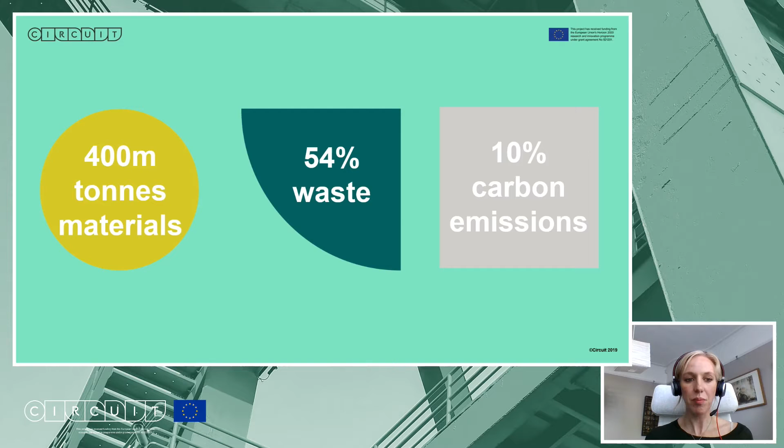And it has been impossible to ignore over the past few years the growing interest and focus on the climate emergency, on climate change. This has been as apparent in London as it has been across the globe. We will probably all remember the protests that have happened, and following this, during 2019, 26 boroughs and the Mayor of London all passed climate emergency declarations and have been working out the strategies to deliver those since.

And now, even more on topic, there are calls from a wide variety of sectors for a green recovery post-COVID, and with the aspiration and call from many areas to build back better. So we need to find solutions that allow cities like London to accommodate growth whilst also tackling the climate emergency. And circular construction is one of these solutions. It's not going to solve the picture by itself, but it's going to help.

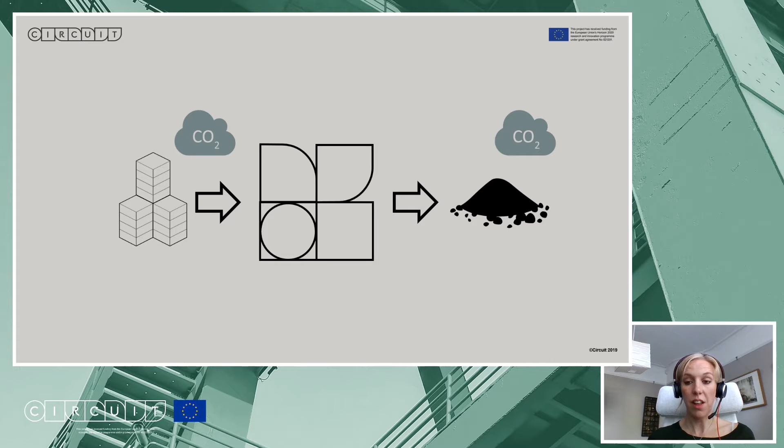And so the basic premise of circular construction is that instead of starting from scratch every time a new development need is identified, using virgin materials and discarding anything that was previously in that location, we aim to close materials loops. We can do this in a variety of ways by reusing materials, sharing either the assets themselves or materials and components within those assets, leasing, repairing, refurbishing, upcycling, and as we often say when we're talking about circular economy principles, finally recycling. Recycling is our last resort in a circular economy world, whereas currently it's often seen as the best outcome that we're aspiring to.

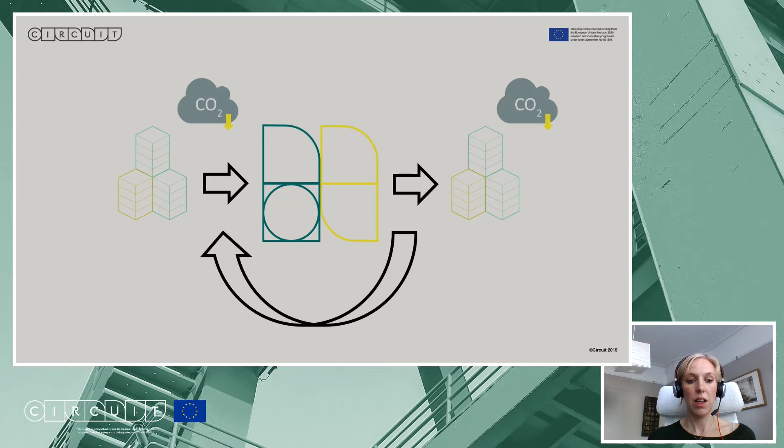And we believe if we start each new development as an opportunity to really embrace circular construction techniques, we could dramatically reduce the carbon emissions associated with the growth of our city. Now, these are not new ideas. It's not brand new thinking. This has been going on for a number of years. I was researching these ideas when I was in university. And so there's been pockets of good practice and great exemplars both across London and across the globe.

But the reality is that these are still the exception. They are not the norm. And if we really want to deliver that growth whilst minimising carbon emissions, like I was suggesting, we need to dramatically scale up the adoption of circular construction techniques. And it needs to become the new norm. It needs to be embedded in city policy, and potentially national policy and global plans as well. And that is where the Circuit project comes in.

So I'm now just going to give a little bit of an overview of the Circuit project. It is a 4-year Horizon 2020 funded project. And at the heart of it, the intention is to increase the uptake of circular construction and enable cities to initiate a circular transition. It's a collaborative project. It started around a year ago in mid-2019 with around 30 partners from across 4 cities in Europe. We have partners here in London, in Copenhagen, Hamburg, and the Helsinki region. And within those partners, we've got all different parts of the built environment value chain represented.

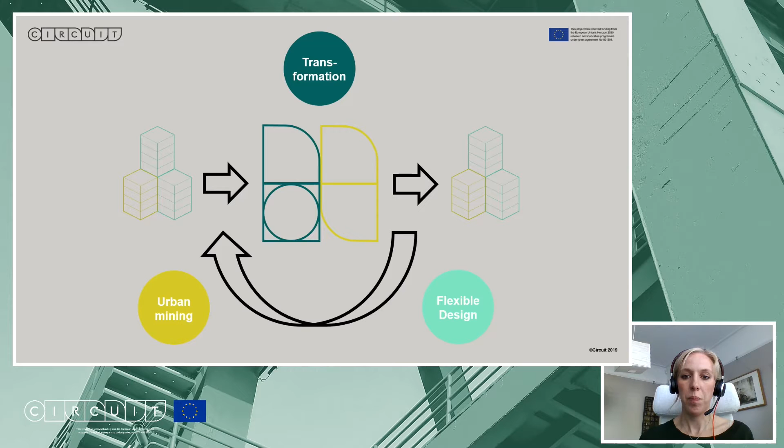So what we're doing in those focus areas is across the 4 cities, we are going to be looking to address some of the barriers and develop solutions in each of those focus areas. We're going to be doing 3 demonstrations for each topic in each city. So that's 36 in total. And this is all going to be supported by a stream of work looking at data. That stream of work is being led here in London by the BRE. So that's looking at both available data, what data we should be collecting, and also how to use that data better. And then this activity in the 3 focus areas is going to develop the insights and materials that we need to explore citywide systems, whether that's governance and planning systems, training and knowledge sharing, or data platforms.

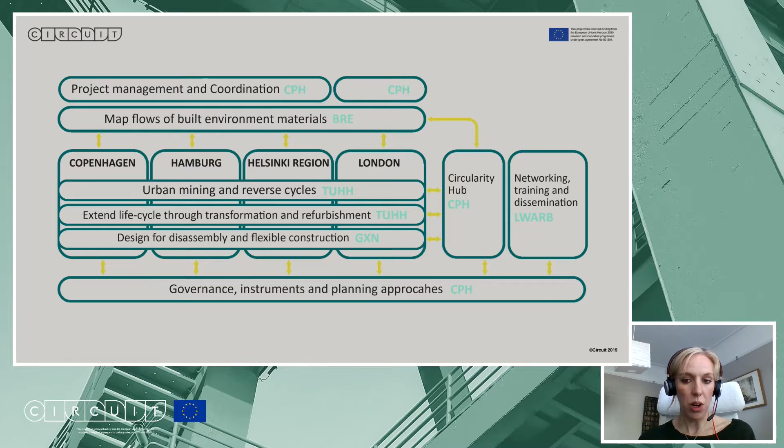Just a little bit more detail on what I mean by those three things. So the examples of the governance and planning activities that we're going to be looking at are developing criteria for public procurement of circular construction, recommendations for urban planning policy, tools to collaborate with developers on implementing circular construction techniques, and roadmaps for each city.

The training and knowledge sharing activities are going to be really wide and varied. This event today is part of that, so there will be further events and other hackathons throughout the rest of the project. We will be setting up a variety of networks. So some of these are going to be industry networks, and we'll also be having networks focused on policymakers within the 4 cities to share best practice. And also we're going to develop a network of city authorities outside of our 4 partner cities to help disseminate the findings further, and also to learn from other cities outside of our partners.

There's a range of training activities going to be conducted. These will be towards the latter part of the programme, but we will have some e-learning modules created. There will be summer schools hosted at our 2 partner universities, one of those being Imperial College, and there'll also be some in-person training sessions.

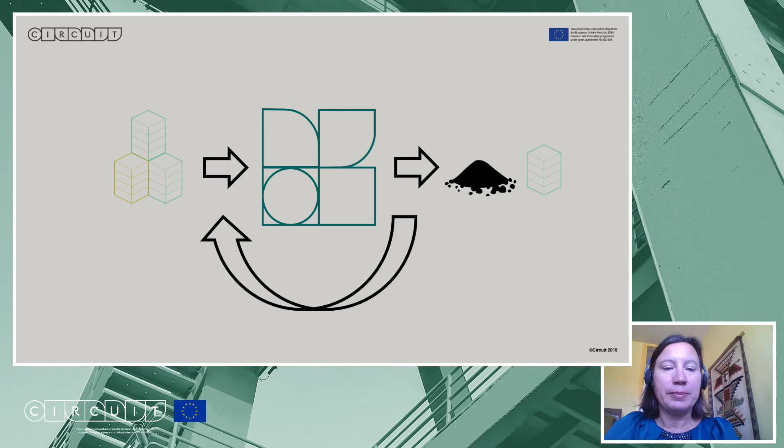So it's one of 3 areas that are really trying to do a practical transformation in terms of these 3 aspects of circular economy. And within each of the cities, there are these 3 demonstration projects within each of the 3 areas that we're going to talk about just now. So in terms of the urban mining, as I said, the focus is really on demolition. And one of the key aspects of, I don't know if we can go to the next slide.

So the next slide gives a bit more detail about what sort of sits underneath that particular work package or aspect of work. So a really key aspect is pre-demolition audits. So we already do these pre-demolition audits across Europe. There's a mixture of voluntary and mandatory systems that are in place. In the UK, it's very much a voluntary process.

But I think it's fair to say that everybody's doing it slightly differently, and also the actual process of doing the pre-demolition audit can be quite time-consuming, and there isn't necessarily any follow-up in terms of what actually happens post-demolition.

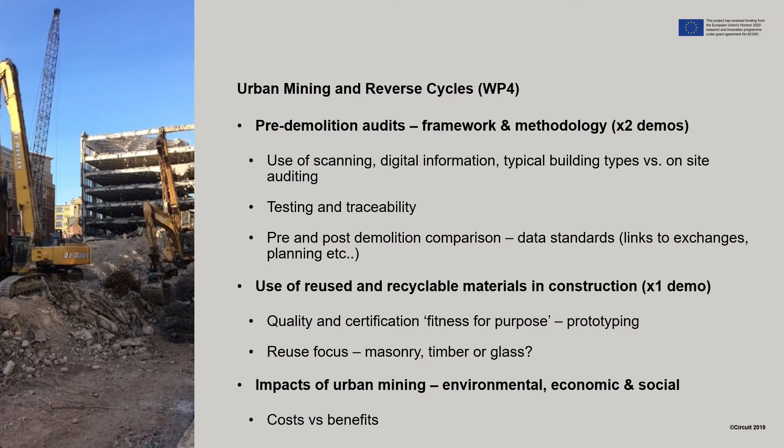So a key aspect is to sort of standardise that process. There is an EU protocol on pre-demolition audits. So linking into that, what is our framework that we can harmonise, and the methodology that we can test out to actually make pre-demolition audits a much more valuable tool in the process of circular economy.

So within London, as with each of the cities, there are 2 demonstration projects. So anybody that's keen to volunteer projects, it'd be really, really good to hear from you.

And we're trying out a combination of approaches, because the other thing that we're very keen to do, particularly in London, is to use technology to make these audits not only quicker and easier to do, but then also the ability to transfer that information to make the calculations, for example, on environmental and economic cost-benefit analysis, to make that much easier.

So if we have this database of existing information that we can import, then we could potentially speed up and make better decisions in terms of the ability, for example, to reverse some of the elements within the built environment, reuse, ideally. And with that also comes the idea of greater or more robust testing and traceability. So from the pre-demolition, all the way through to where the products and materials may go back into the built environment.

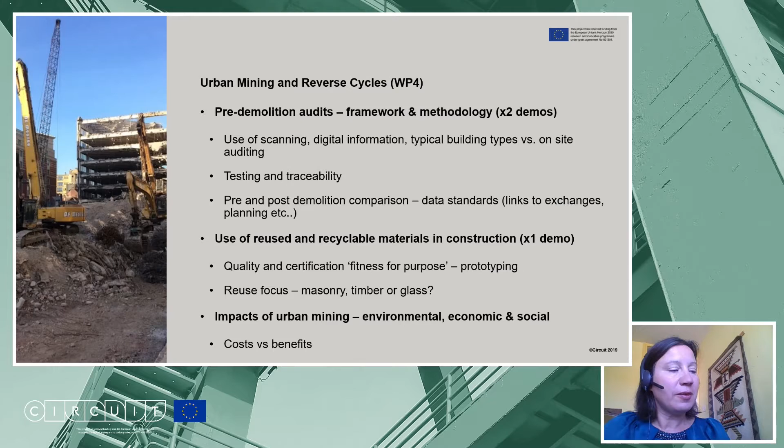So I think that's enough from me. I don't know if there are any questions. If you've got a difficult question for me, I'm hopefully ready to receive it. Thank you very much. Hi, Jay. Thank you very much. I'm just going to move us on, I think, for time, but no doubt some of our attendees will have difficult questions for you.

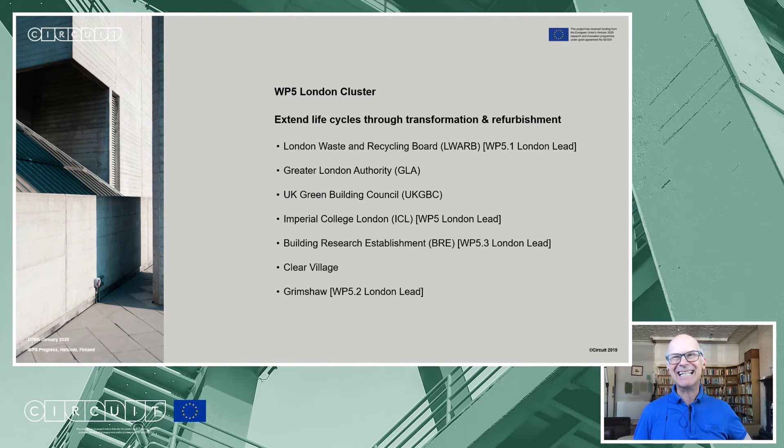So in this work package, this presentation just shows some of the partners involved, and we've had some of them described earlier. We're really looking at extending the life of our buildings through transformation and refurbishment. And we've split up our work into a series of work packages, and we'll just go through each of these. So my next slide, please. And one of them is to identify target buildings and neighbourhoods for transformation.

Can we pick upon neighbourhoods? Earlier on, Andrea showed some of the developments in London, looking at maybe homes or buildings for 500,000 people that could experience transformation. But how can we appropriately identify those neighbourhoods and do it in a way that is sympathetic to the existing residents and ensuring a solution that is going to last? It's so easy to talk about sustainability, but not deliver a sustainable solution that will last generations. So this is one of the areas we're looking at.

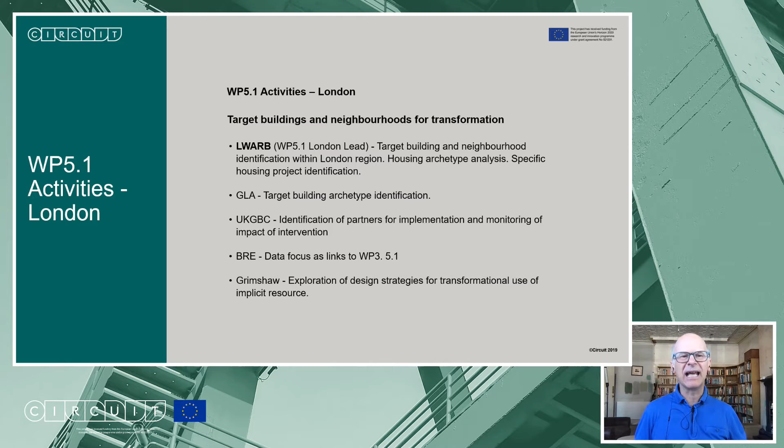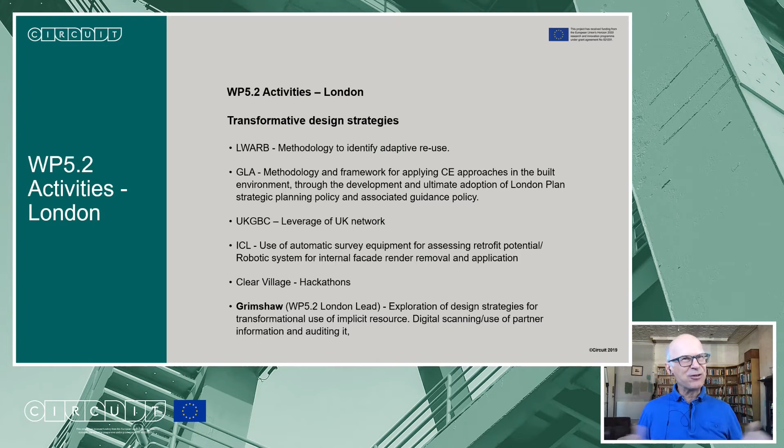Our next slide shows an input principally led by the architects within our team, looking at transformative design strategies. I am a professor, and of course I love definitions. For me, design is the transformation of an existing state into a preferred state. Now that's a very academic or generic definition, but design for me is about transformation. What is it now? And what could it be that we actually want? And that transformation is absolutely key in our thinking.

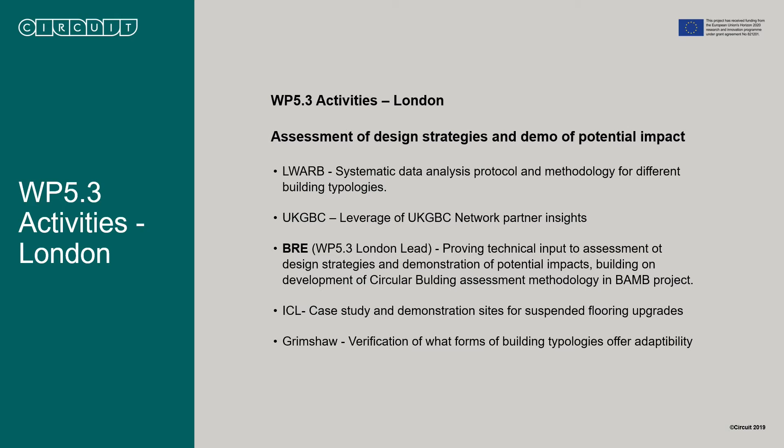And our next work package in the next slide is looking at assessment of design strategies and demonstration. I work in a design school or a design engineering school, and so much of what we do is through prototyping, and we use about 13 types of prototyping. And everybody's used to what designers do. We'll have our fancy computer-aided design model and maybe 3D print a form prototype, something that looks great.

But to me in design engineering, and what we're doing in this series of projects, is really trying to demonstrate practically that things can work and that they will deliver a responsible solution that can be sustained through the generations. And this is absolutely key for me. We've talked this morning a little bit about interest in retrofit and perhaps realising the potential for the life of these buildings that we've already got through extended life interventions.

Key to that is information and what I would call appropriate decision making. We have great data feeds. We can scan buildings. We can use feature recognition. We have lots of databases, but we're not very good at blending these data sources together and actually using that data that we have at the point of decision making and using it wisely. And this is something that we really need to work upon.

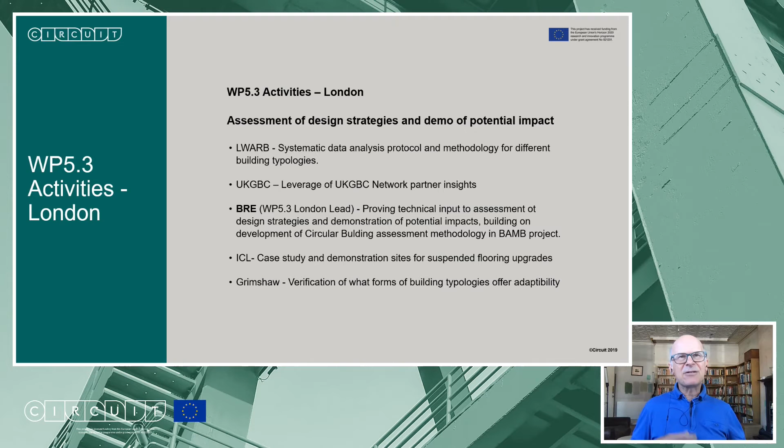And in my final slide, I just want to give you a little bit of an indication of some things that I'm practically engaged with. So as a professor, I love to talk about stuff, but as a design engineer, I love to do stuff as well. And I've had the privilege of working with a company called Q-Bot Limited.

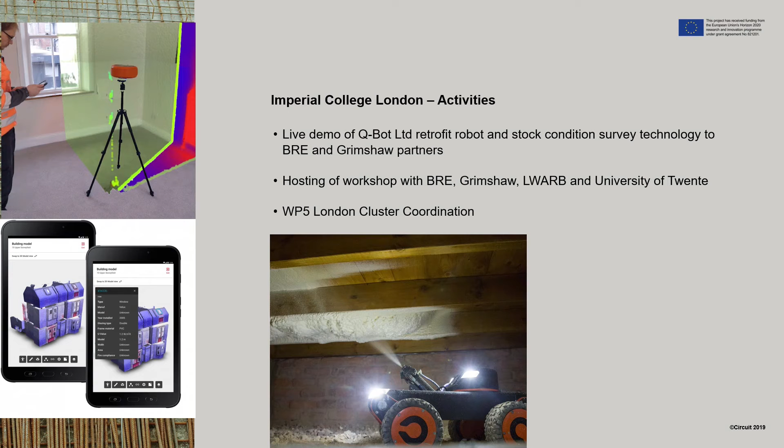And we've leveraged that surveying technology, and you can see some images on the left-hand side of your screens, which show some of the scans that we're now getting, scanning buildings from the inside or out, and developing our capability in feature recognition. Could we scan a surface and say what material it is, and then get that data feed in for a decision about whether that material could be safely used in some kind of future refurbishment, as Julie from the BRE was indicating.

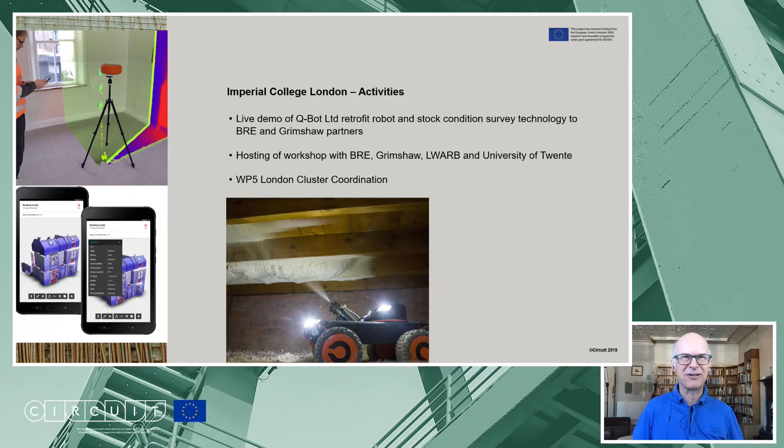So an exciting project, and I'm really looking forward to this morning and the day with you, exploring the circular economy and the transformation of our society.

Thanks very much, Peter. And in interest of time, I will speed us on to Peter Swallow, who works at the architects Grimshaw, currently engaged in R&D into material efficiency and circularity in the built environment, with a focus on design for off-site manufacturing, operational flexibility, adaptive reuse and construction. He's going to cover our final topic before the questions on flexible construction. So over to you, Peter.

Thank you very much. So at Grimshaw, obviously, this is a topic that has been at the sort of core of our DNA for over 40 years now. Design for disassembly and flexibility is something that has been embedded in almost all of our projects, going all the way back to the beginning of Nick's foundation of the company.

And this particular work stream that we're looking at within the context of Circuit is looking at designing buildings based on flexible construction techniques, so they can easily serve multiple purposes, which is leading towards extending their life cycles, all for disassembly and to facilitate the reuse of those materials, so it's easier to break those elements apart into their constituent parts. This is something we've had a lot of experience at Grimshaw, and it's something we've actually been at the sort of application end of over the 40-year period of the company. So we've got a lot of in-house knowledge around how materials and how systems can be brought together in a clever way, in order to make sure that they're inherently able to facilitate disassembly at the end of life.

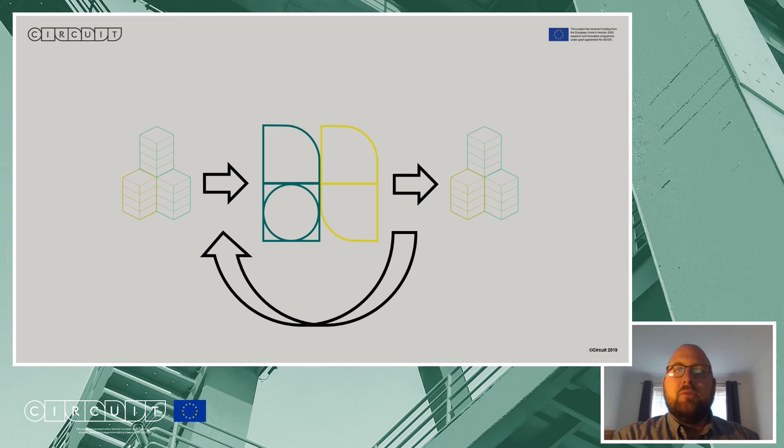The project itself, we're looking at a number of demonstrators to be rolled out through this work stream in order to demonstrate design for disassembly and flexibility. And this is all leading towards facilitating the uptake of these practices. And this focus area will demonstrate a number of full-size modular and adaptable building systems. So we're looking for partners across London to support this and to help us identify demonstrators within specific boroughs within London and working with specific developers. So if anybody is interested in being involved, we'd very much like to hear from you. We have a primer that we've developed that gives a little bit more detail about this work package and what the deliverables are that we're trying to achieve here.

So as I said, these systems will be based on design for disassembly and flexible construction principles, with an aim to easily enable alterations to happen during the life of the building, which can fit the changing needs of tenants without having to have major construction intervention. The idea is we're trying to facilitate easy adaptation that can be done at the user level ultimately, or with very little intervention from specialist help. The solutions will be developed, as I said, using existing products and methods to showcase feasibility of circular building concepts. And this will be done through 12 demonstrators split across the 4 cities. So we're looking to do 3 in the UK.